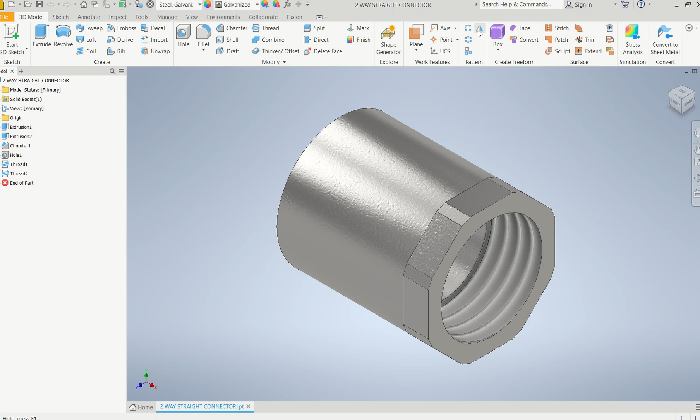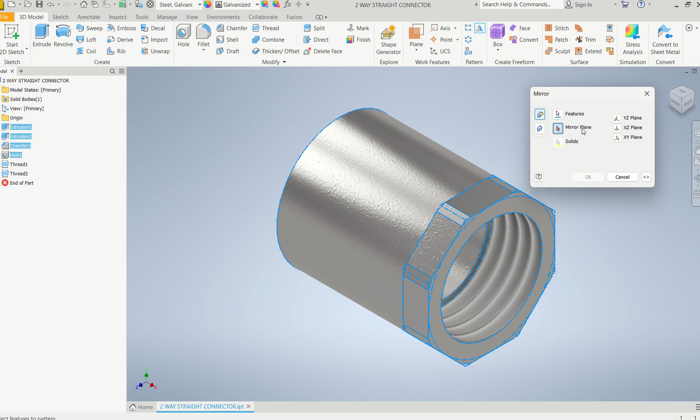Let's try mirror. See this little blue box here, that's asking for the features, so you click on that. Now that feature is not enough, that's just the cylinder. We need to pick up the octagon, select the chamfers, and select the hole. So everything is basically blue. If you move your mouse over there, anything that pops up green, you just make it blue. Now come down to this little box here and click on that. That's blue, and that's asking for your mirror plane. If you hover over there, you can see your mirror plane. Go OK, and there it is there.

Now if we come around here, you'll notice the thread didn't come across. That's okay, we'll just click on this surface here, and that should come up there, that information. Go OK, and then we can just hit save. And now we've just saved our two-way straight connector.

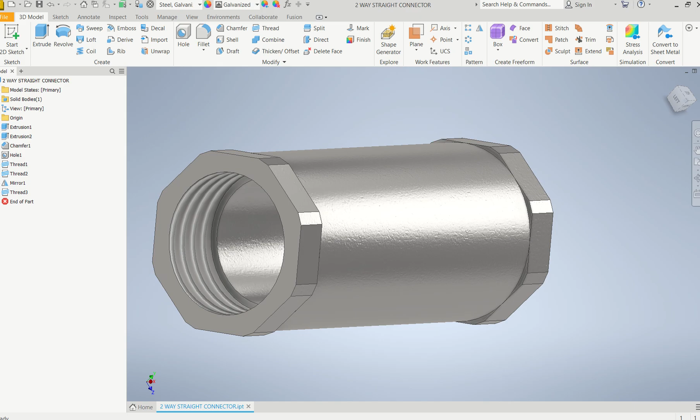So now, while we're at it, we're going to go File, Save As, and we're going to save it as our four-way cross connector this time. So go, do you want to replace it? Yes. And now we're going to turn this one into that one there.

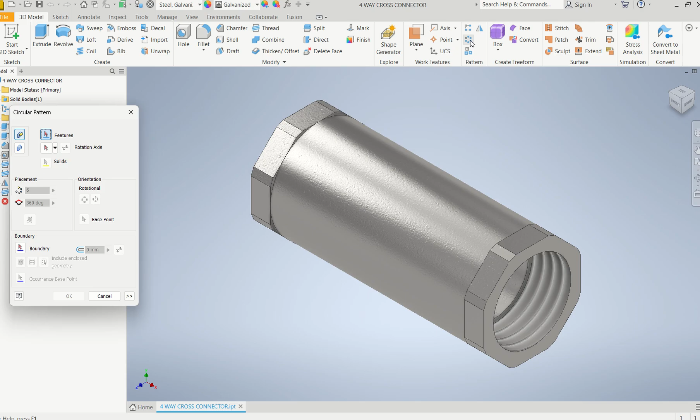So how are we going to do that? Well, you might have used this one here before. It's called circular pattern, just down from where we use mirror. So click on circular pattern, and it's saying, what features do you want to use? You'll say, well, I want to select everything. So what I'm going to do is, see, when I just hover here, it only picks up this part here, but if I come over here, it picks up everything.

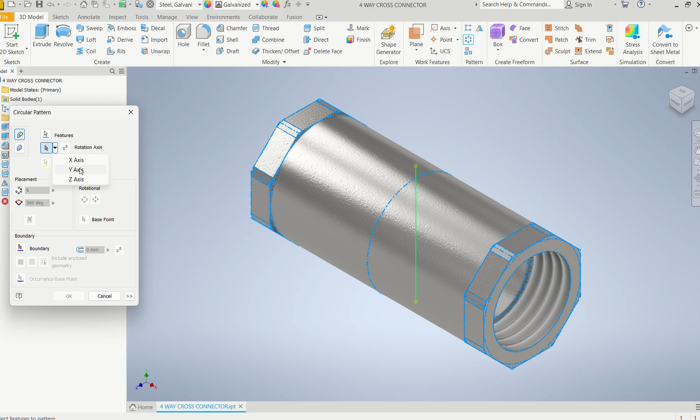Everything's blue. Then we come down to rotation, you click on that. If you drop this little arrow here, you can see these different axis lines. I want you to pick that axis line there, and then I want you to click 2, and type in 90. And there it is there.

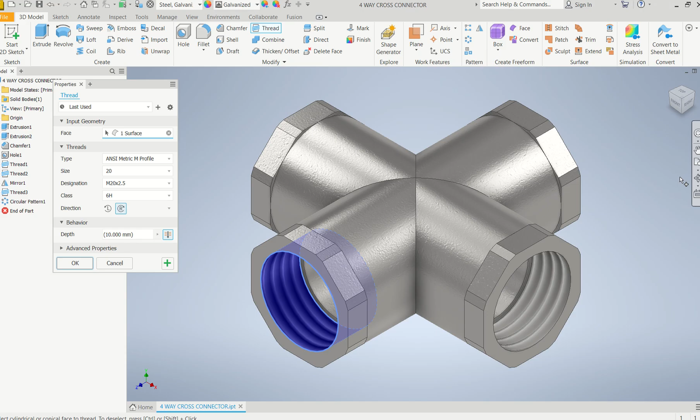So for the thread, we can just go around and put our threads in there.

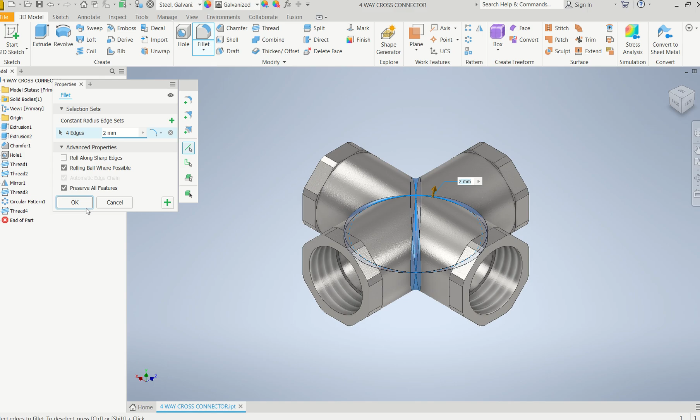Okay, let's go put a fillet in there. So just click on fillet, it should be set to 2 mil. So look, click, click, click, click. Okay, and there it is there.

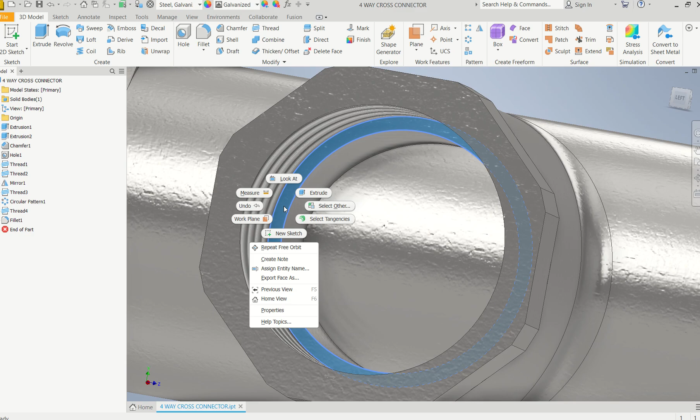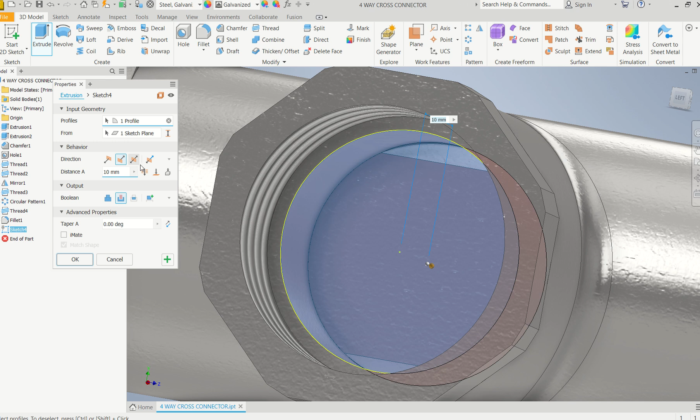Now you can see all the way through that hole, but if you look here, it's blocked. This doesn't go all the way through, so we need to cut a hole through there. Again, nice and easy, so just come up, hover on that surface there, that little section in there, and we're going to do a new sketch on that surface. Then project geometry and pick up that inside yellow line there. Finish sketch, so we've got a yellow line there. It's a sketch, and wherever you can sketch, you can extrude, can't you? So we click on extrude, and that automatically extrudes. We say we want to cut it, and we want to cut it all the way through.

And let's have a look now. Looks pretty cool, doesn't it? So you can do that. Does it actually look like that if you actually had this thing here?

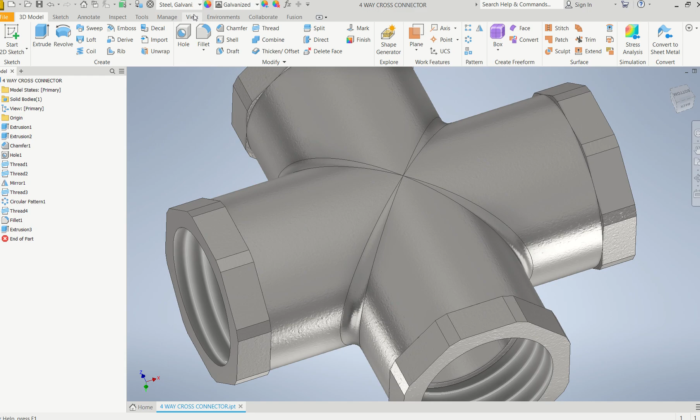No. If I went to view and clicked on realistic, it looks more like that. But sometimes it's easier, especially when you're assembling things, to have it with edges on there, because then you can line things up, you can see where your faces are.

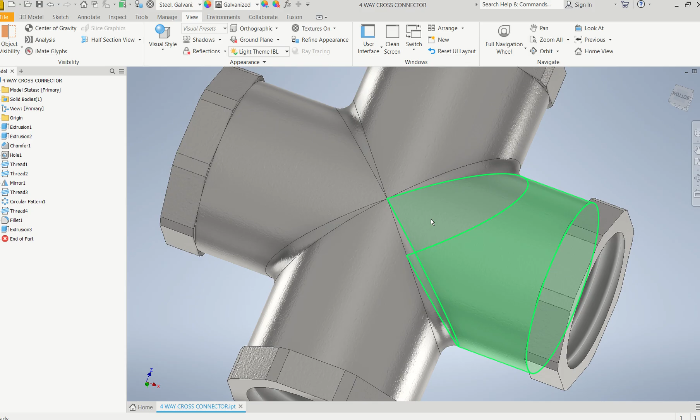Okay, so you can leave it like that, but I just thought I'd show you that. Right, so that's our four-way connector. So far we have made our base, we've saved our two-way straight connector, we've made our four-way cross connector. Okay, in the next one, we're going to make the three-way T connector. We'll see you in the next video.